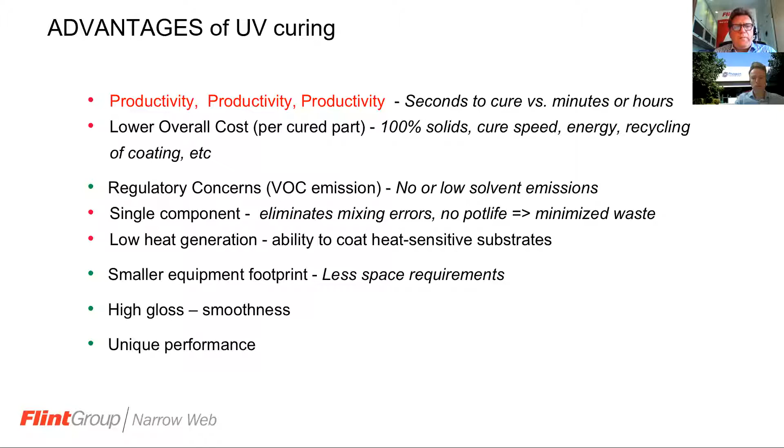The UV ink technology that's been around for most of the time is what we call mercury - you cure with a mercury lamp, a UV lamp. Fundamentally, that proven technology is pretty similar to a UV LED ink from a buildup and chemistry point of view. There are some fundamental differences which we will highlight, and one of them is the photoinitiators used in LED ink versus mercury lamp.

You use pigments, binders, and monomers to make the ink have the properties you like, and the cure performance you like, whether it's an offset or flexo ink, and you use different additives to enhance final performance.

The UV LED curing process is, as with any of these UV technologies: the ink is applied to the substrate, you expose it to UV light, photoinitiators react to the light and form free radicals, and these initiate the polymerization of the binder. So nothing evaporates - the binders cross-link and form a strong chain that adheres both to the substrate and internally, giving you a solid ink film. Solvents do not evaporate during this process.

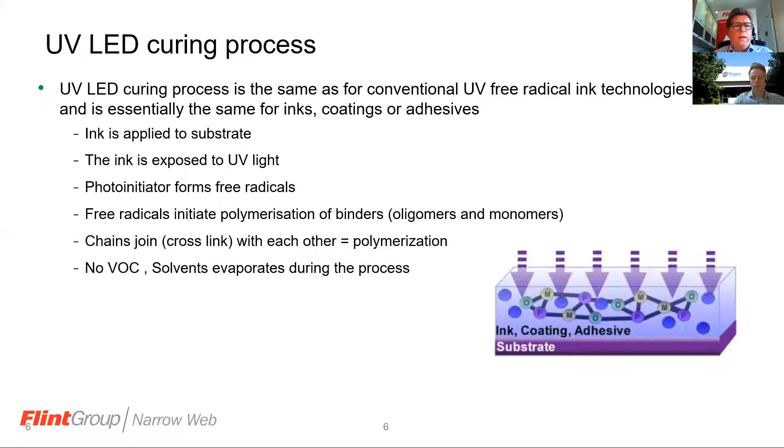This illustration refers back to mercury lamps, where you have a wavelength spectrum in a UV mercury lamp that goes from 200 nanometers up to 420. Different lamp types can have different peaks and troughs in this wavelength area - it's all over the place. And to be honest, it's needed to cure some of these things.

The pigment, illustrated here by a red, yellow, blue, and black line, absorbs the light, and that's why we see the different colors. This illustrates that red ink is easiest to cure because the pigment absorbs less light. Black is the hardest because it absorbs almost 90-95% of all UV light we emit. It's well known in the industry that black inks are hard to cure.

If we apply LED light, UV LED light, there is a very bespoke wavelength area where the lamps or diodes emit the light - that's 395 nanometers. It's then very important for the ink supplier to make sure photoinitiators are reactive in this area. The benefit of this wavelength is that black inks are easier to cure and cure better than with mercury, because the pigment is not so absorbent in this area.

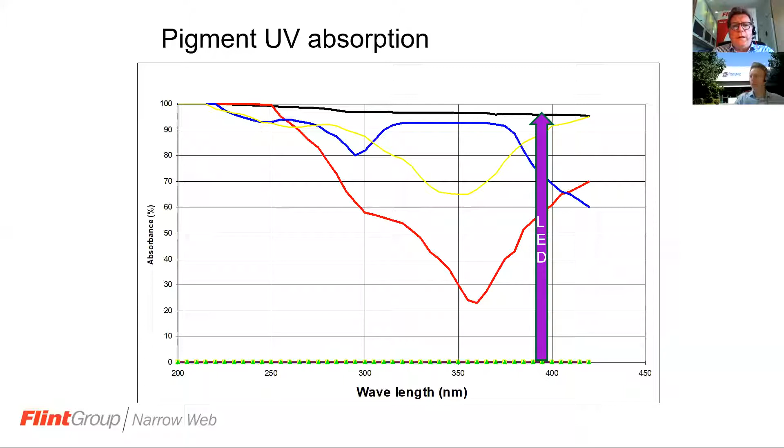Another fact with the 395 nanometer is that LED inks have better penetration of the ink film - the longer wavelength penetrates any ink film better, and therefore you get better bond strength, better adhesion, and better through-cure of your ink film. That's also a benefit that has been proven over the years.

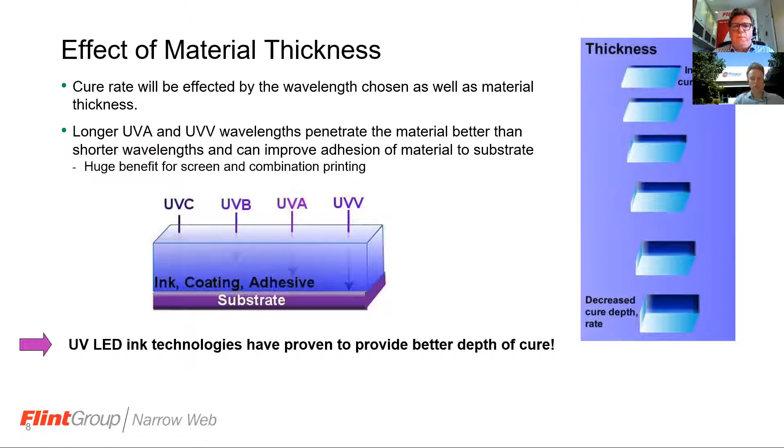We take some of the benefits of UV for granted - we feel complacent when we talk about these very strong benefits of a solvent-free technology. In the narrow web market, UV technology has been around for 20-25 years, and it's been going through the same sort of competition against solvent and water-based that we now foresee in flexible packaging. But the benefits are clear.

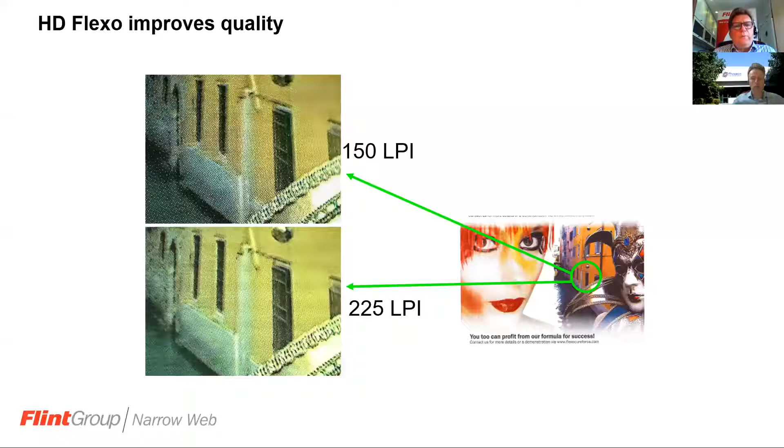I don't take this for granted for the ink - I know there are a lot of technologies that have been developing. Plate technology is one - recently you now have much finer resolution in printing plates available, and now you can clearly rival both gravure and offset technology with Flexo.

But you might say printing with UV on packaging, that must be silly - and maybe it was 25 years ago, because it was uncharted territory. But today, UV technology is proven and tested to meet all the most stringent demands for packaging print. In fact, there are no separate demands on UV technology - it's the same criteria we need to adhere to as for any ink system, whether it's solvent, water-based, or oil-based.

They all need to be of the right base to meet packaging demands. I haven't said it, and I know this has been mentioned before, as a reference to low migration inks. That terminology we don't use anymore.

It's been decided in EUPIA that the right term should be food contact material inks. There's a well-defined description of what is a food contact material ink and when we can't call it that. These demands are the same whether it's a solvent, water, or UV ink.

So one could say that food packaging safety is all down to the ink maker. In this simple analogy, it's obviously very important what we select to be in that ink container. But then that ink is processed, printed, and used in different applications with plates, anilox rolls, lamps. And in the end, the final end use should consider what substrate, how the package is stored, and the outer demands on the package. All these three elements together form how you can build a safe package.

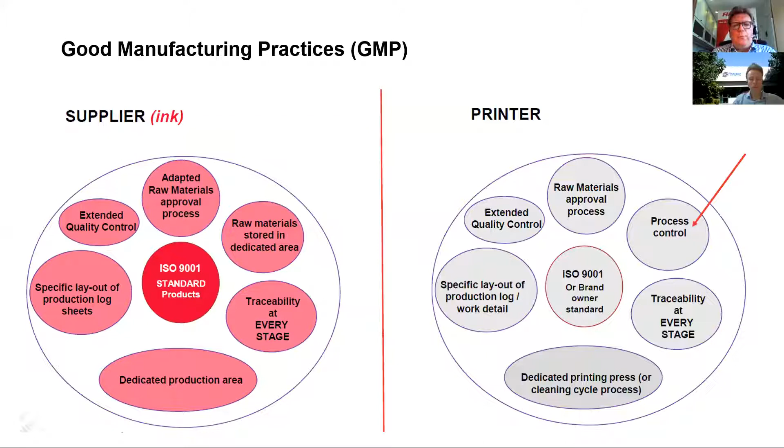One thing you might forget, if you're new to food packaging, is that you should also pay attention to GMP process in your own printing press or premises, because there are stringent demands on how you keep traceability and track record of what you actually did. I think here LED also offers significant benefits to keep process control of how you print and the lamp operation.

When we say food contact compliant ink, or low migration ink as the old definition, we said it has to comply with the following regulations. I apologize, there's not one single one that makes or breaks this, but I think Swiss Ordinance and Nestle Guidance Note are the two main ones people refer to today as modern requirements. All of these we take into consideration before we announce that an ink can be used for food packaging.

And we will obviously, in getting into that situation, support clients going forward with all the different means of how to prove to brand owners that everything is in good order.

The ink that Soma will be using at the demo you'll see later is EkoCure Ancora. It's fully compliant with Swiss ordinance and Nestle guidance note. It's an LED curing ink that we know, have tested, and proven will withstand most stringent migration tests. In this case, I just referred to 95% ethanol, 10 days - that's quite a stringent demand, and it passes all the migration requirements you have.

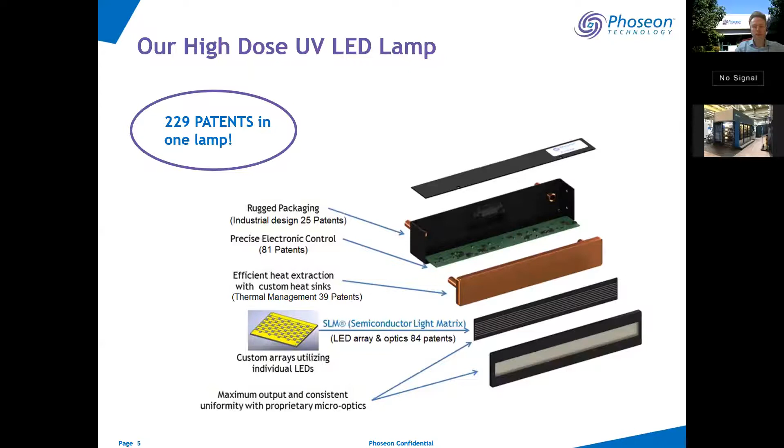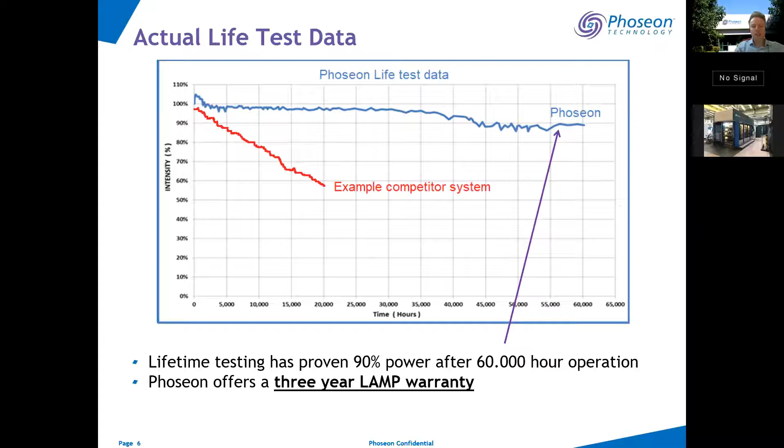The actual life test data of our lamps shows you that even after 60,000 hours, and that's 60,000 hours of operation, so we only count the on time, as LED lamps can be switched on and off within 20 milliseconds. So 60,000 hours of operation, and we are still at L90. L90 means we still have around 90% UV intensity. So this is well within the operating window of UV LED ink.

So why is UV LED in CI Flexo actually a good fit? Well, UV LED inks, as Niklas already mentioned a couple of times, they do not contain any solvents. So what does it mean for you? Well, for you, it means you don't have to clean the machine after every shift or unexpected stop like a power cut. So the ink can be kept on the machine, and you can come back the next day and simply start the press off. It does not cure without a lamp.

And this is a very important message here. And also the ink, as it does not have any solvent or water inside, it's really the ink behavior, and humidity and temperature does not have any influence on the ink behavior. So also no controlled press environment is necessary. There's no solvent. Again, we mention it because that's a big plus of UV LED. So you don't need an extra oxidizer in case you are thinking of a new machine, or any solvent recovery system. No ink or viscosity monitoring system is required.

And the machine, for example, that we will be showing today does not have ATEX, as the ink is just not really explosive. No solvents or ammoniac means no smell as well. UV LED lamps give you the benefit of a very much reduced heat transfer on filmic material especially, and on the CI drum. So no additional chilling capacity is required for the drum itself. And the UV LED drying is drying directly after the print station. No drying tunnels are necessary, giving you a much smaller footprint for your press.

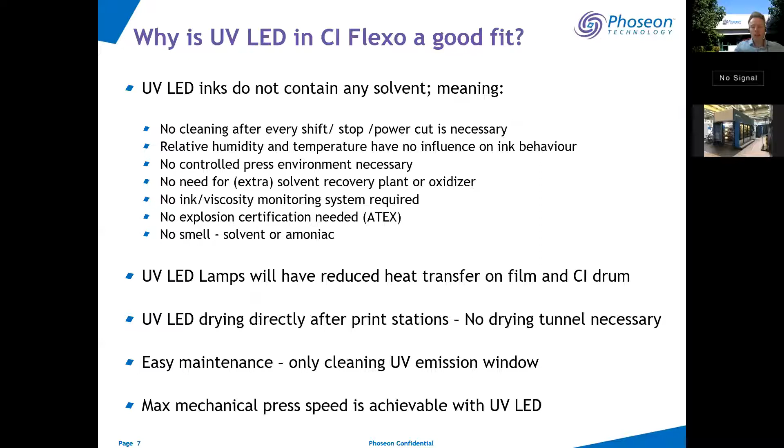So what benefits do you get in CI Flexo from UV LED lamps and inks? We identified here with our partners and customers who are already running UV LED lamps in CI Flexo three major topics, let's call them. The first one is what we call the advanced capabilities.

This is what you can do more with your press, and it gives you the possibility to run short print runs or just-in-time delivery. A very good example is the show we will be seeing here with the Optima Press, as they change jobs within minutes, which is virtually impossible with any other ink technology.

The heat sensitive thin substrates can be printed much better, much faster. The consistent and controlled UV curing process and the parameters that we give you just give you full control of your lamps and full control of curing.

When you use the same parameters with the same substrate and the same ink, you will get the same results. It will not depend on the environment, the operator, or any other external factors. The ink itself will give you brighter colors compared to water-based and solvent-based technology. And the lamps are IoT and Industry 4.0 ready.

So we like to call them digital curing, as they are very different to the analog system of mercury-based UV lamps. The economics, well, there are different factors here.

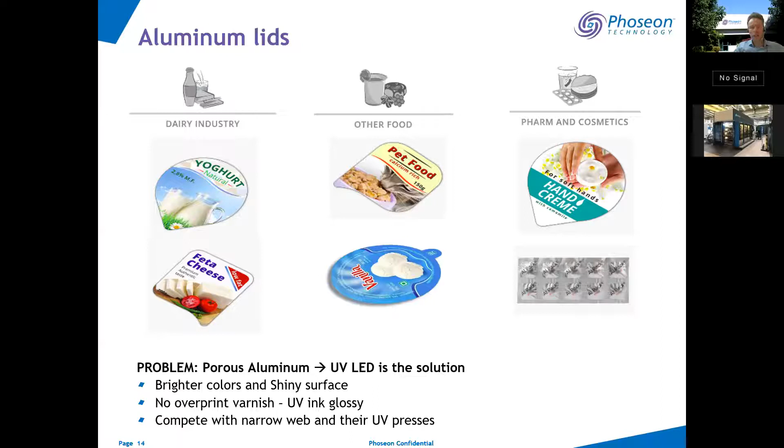So now the third presentation, which will be focused on the printing press itself. Let me start our presentation. As we have heard quite a lot about UV technology already, I will focus on the Optima Flexo press, and later in the second part of my presentation, I will focus on the UV LED modifications to Optima Flexo.

So if we take a look at the short-run Flexo family, the Optima Flexo family, the press which we will see during the demo is the one on the left-hand side, a startup press, mid-web segment, Optima Flexo, the smallest one in terms of width as well as repeat length. But UV LED technology could be implemented also to Optima 2 mainstream Flexo, which is 1.3 meters wide, or even to the 10 color or long repeat length version. So there are really no limitations for UV LED.

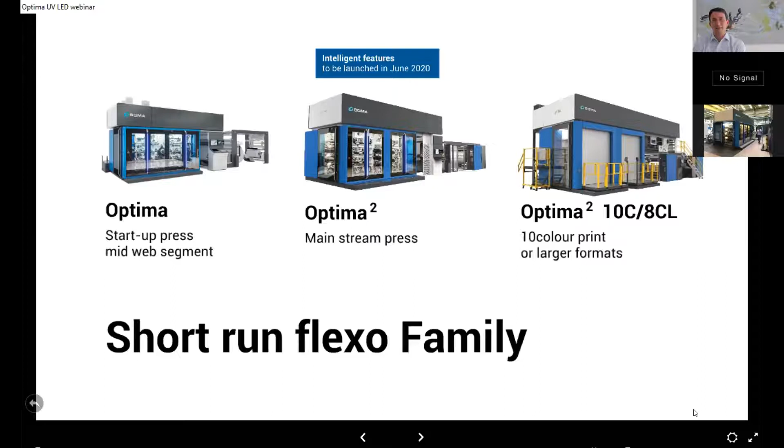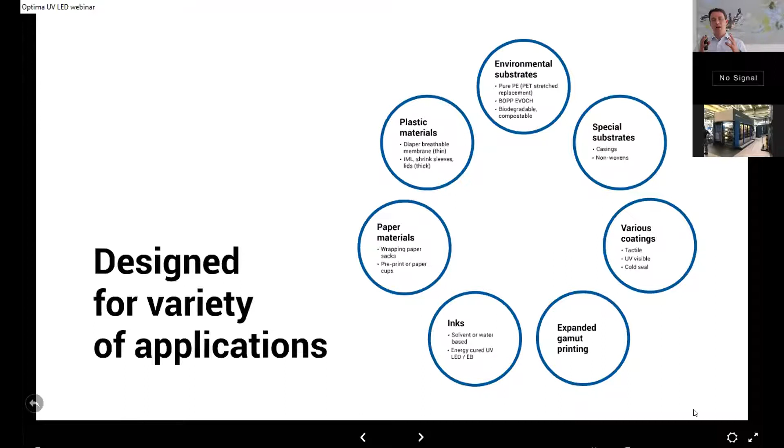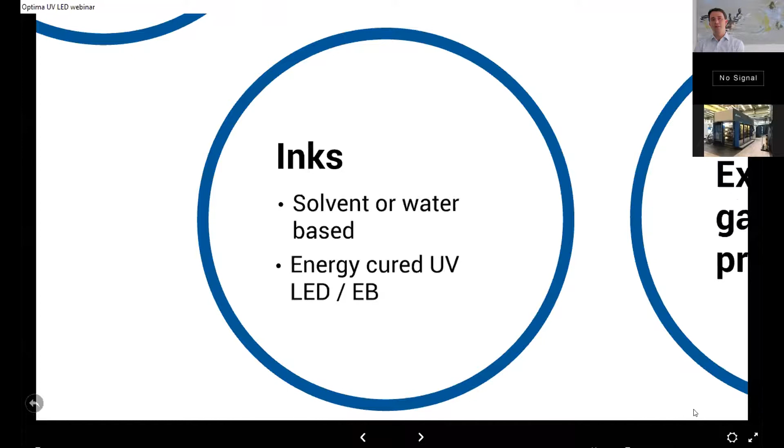So initially, I've seen that the audience is quite a few people from narrow web business. Optima is CI Flexo, of course, and that gives a possibility to print several different applications. In terms of inks, it's quite clear: solvent-based, water-based, or energy-cured inks, UV or EB. In terms of paper substrates, we have the possibility to print thin wrapping paper or paper cup, which is very thick and rigid material. And same with plastic, we may go low density polyethylene, just a few microns, a diaper membrane, or we may print quite thick lids or shrink sleeves. Of course, new environmental substrates and applications are feasible to print on Optima.

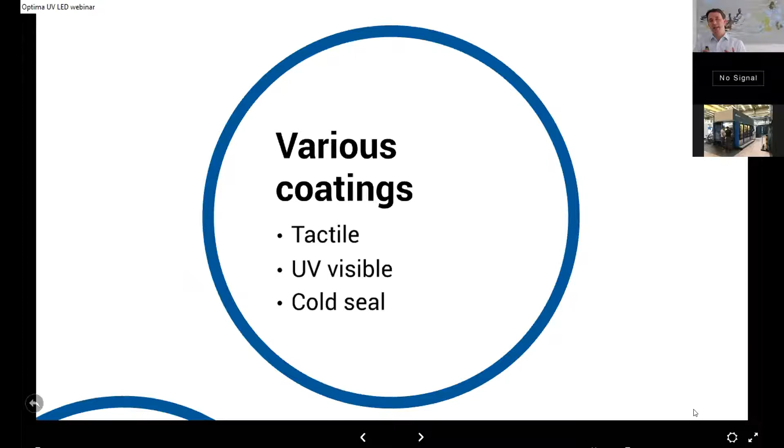And special substrates, such as casings - this is quite interesting for UV LED technology. Today you will also see a turning bar system on the printing press with an in-register reprint unit. All of this together with UV LED could be applied for the casings market segment. And mainly due to the downstream stations, various coatings could be applied, which again gives a wider range of possible applications.

Optima was designed for expanded gamut printing. This is a must for the future. So let me answer the question: how is it possible that we handle all of these applications? Well, this is due to 4 main reasons.

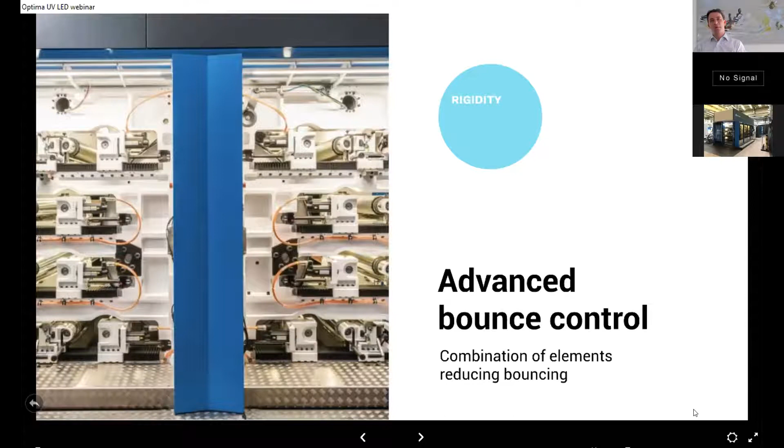So that gives you the possibility to print problematic designs with higher speed. This is due to the rigidity, meaning how strong the construction is, due to mass, how heavy the printing unit is, and also due to damping properties - what kind of material we use to minimize vibrations, like carbon composite or cast iron.

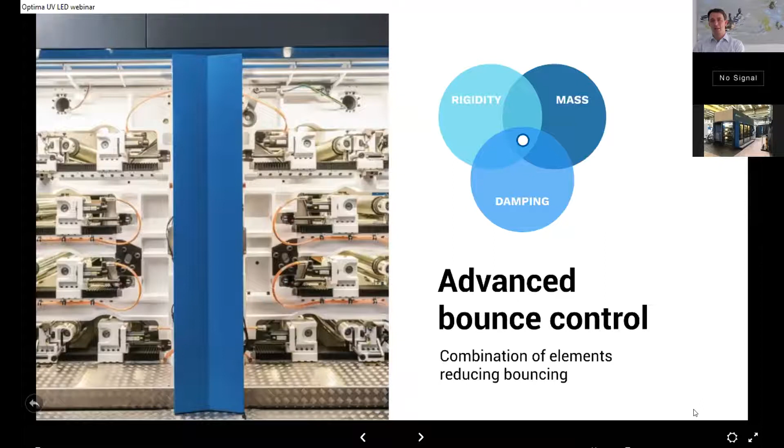Let me mention one more thing. In the next upcoming webinar, we will launch a second generation advanced bounce control system with one new intelligent feature that really improves print quality. Not today - at the beginning of July, it will be public.

Side frames, extremely heavy, very rigid, made out of one piece for small Optima. CI drum just goes in the middle, made out of cast iron. So again, very good dynamic properties.

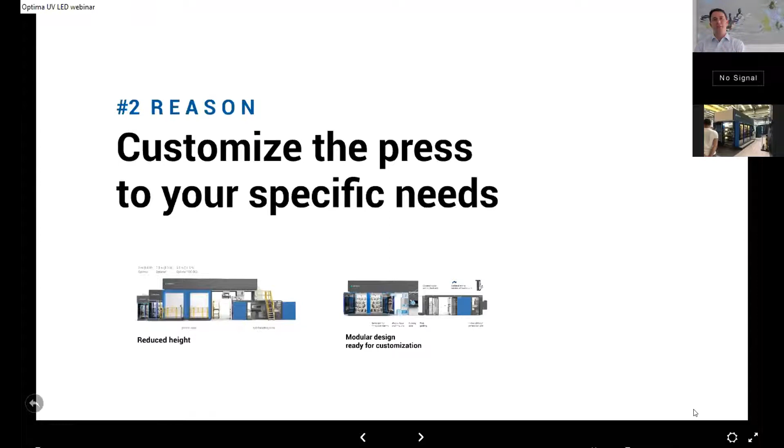Reason number 2, to be able to print all those different applications. Customization to your specific needs.

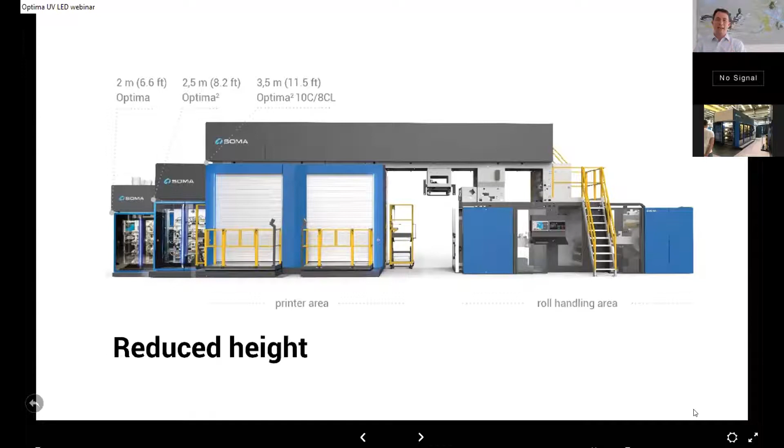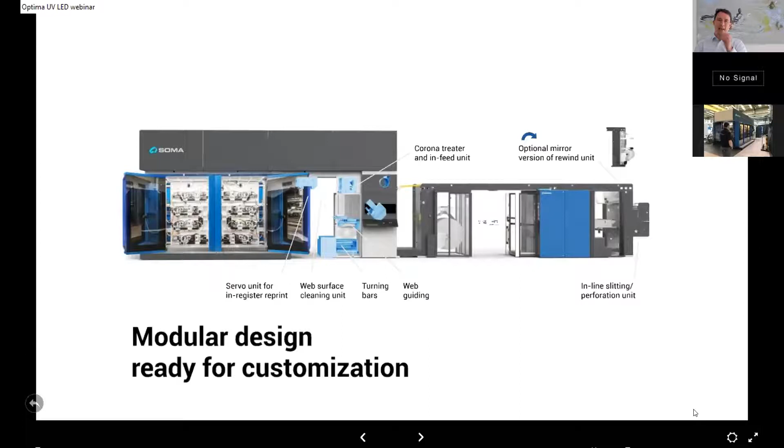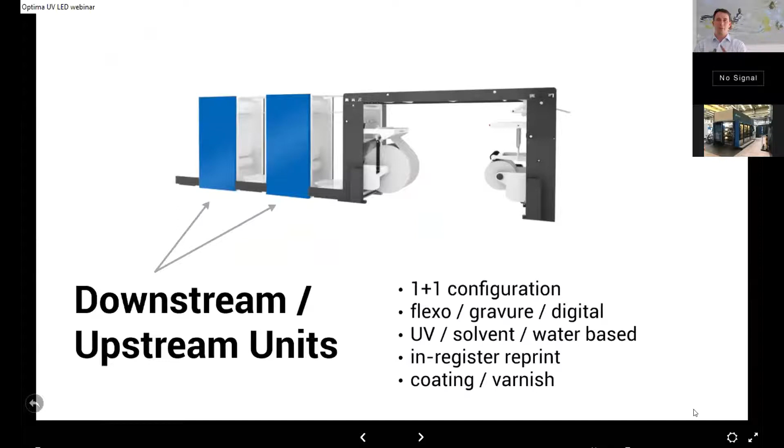If we take a closer look at the design of the press, not only is it one of the smallest on the market in terms of CI Flexo, but we divided the printer and roll handling area so that the right-hand side of the press could be modified according to your specific needs. That part we could adapt to your specific application during production of the press, or later on as a retrofit. So different winders possible, but mainly different downstream or upstream stations - Flexo, Gravure, digital, UV, solvent, water-based, in-register reprint, coating, varnish. All of that is possible, providing several different options in terms of application.

Reason number 3, yes, short runs. Long runs are history, short runs is future. We developed a technology that minimizes the job changeover.

Here, maybe I'll reveal a little bit about the upcoming webinar, not today but in July. We will show you the new automatic plate mounting. We try to automate the process, so we will automate the plate mounting, meaning it will be quick, without human error, a very precise process. As part of the automatic plate mounting, we will measure the register as well as the topography. This is the ARUN technology, so that later on the press, we would set register and impression in fully automatic mode without human operator mistakes. That's called ARUN technology - wait for the next webinar.

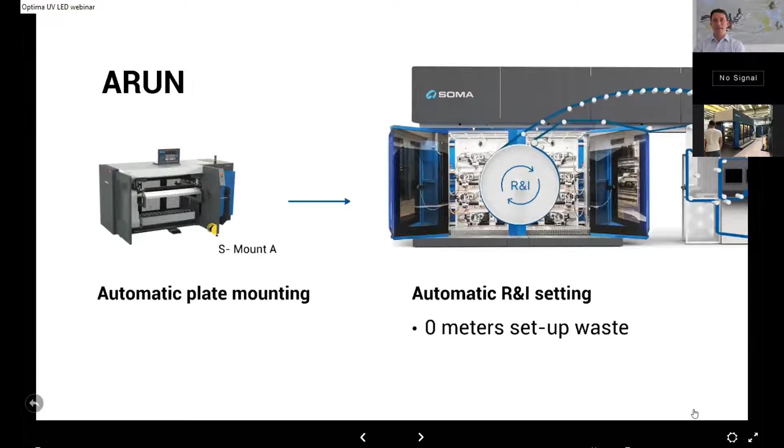Today on the press we have Falcon 2 system, a semi-automatic system. But since we are focusing on the UV LED technology, we will not use ARUN, we will not use Falcon 2, we will use recipes to do the quick job changeover. If you are interested in a really high-tech changeover technology, wait for the next webinar.

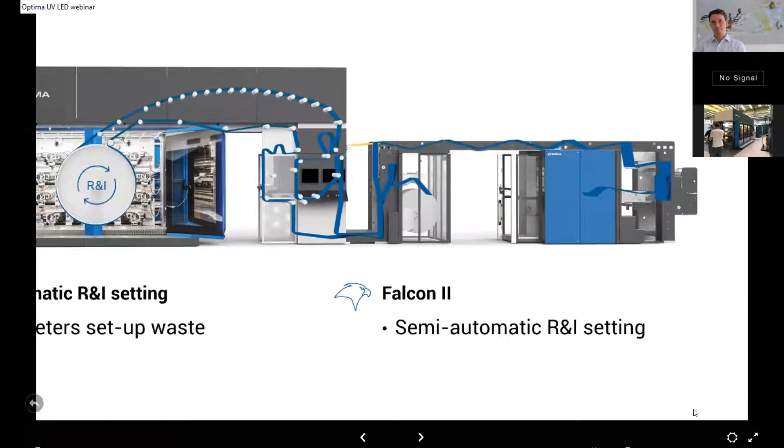And the cartridge system - this is what we will see today, because that's really a special feature only available by Soma. And for UV LED, this is quite handy. It is an ink compartment locked directly to doctor blade chambers.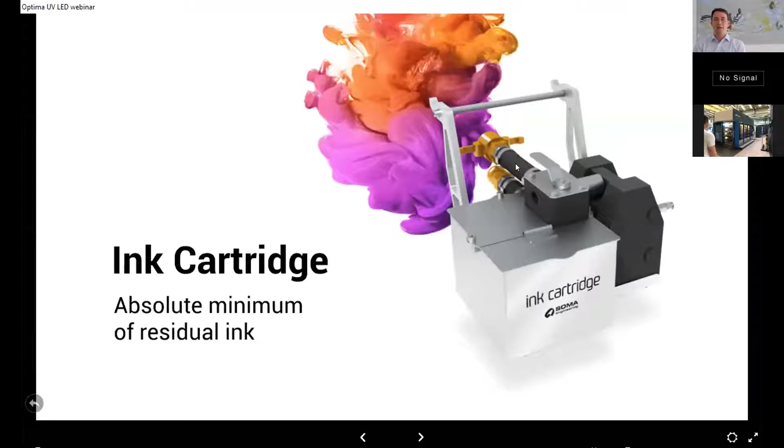You see here the small houses, so we omit the long housing and the whole inking system. The cartridge is locked directly to the doctor blade chamber, so we start to print with minimum amount of ink. And also for the wash up, there is minimal residual ink in the system. So for applications like metallic ink, or Pantone which has a very small area to be printed, or UV LED ink, or any expensive ink - this is to minimize the residual ink in the system, in the cartridge.

And the last reason, and then we'll go closer to UV LED technology - it is environmental printing. Optima was designed for hybrid solvent and water-based presses, as well as for energy cured, which are considered environmental, and this new biodegradable substrate.

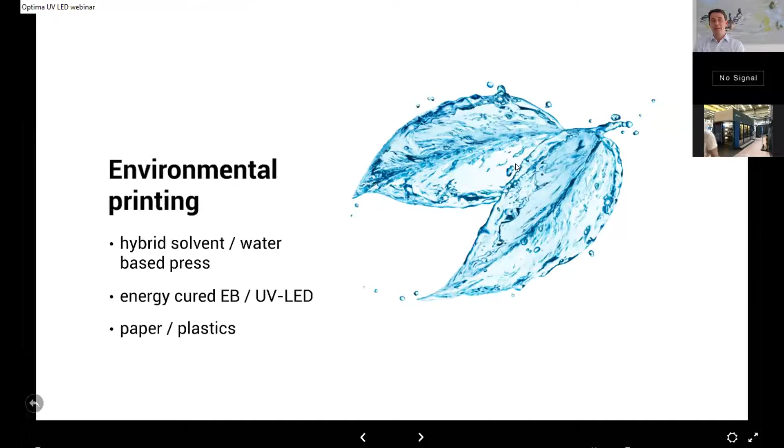So when we go to UV printing, in general UV, this is a green technology. This is what the brand owners would like to have - no emissions, no solvents, VOC emission-free printing.

As we heard, there is a higher pigmentation in gloss, so therefore we may use less ink for the print. The amount of ink to be transferred onto the substrate is much less compared to solvent-based. And we do not have to do any wash up, as Adam said, at the end of the shift - again, no solvents involved. In connection to ECG, this is efficient, but this also saves nature.

When we take a look at the benefits, especially of UV LED printing, there are several other benefits - 50% less energy compared to conventional UV. There was a question regarding the speed - yesterday we printed 300 meters per minute with both of the designs. Several other benefits were mentioned before.

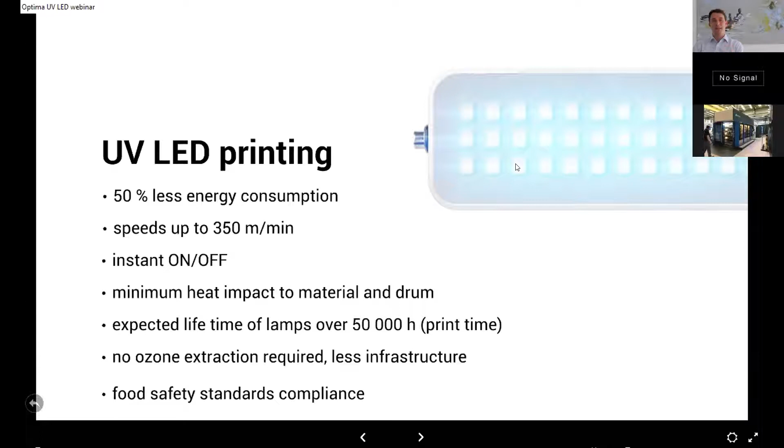So let me get to the point to introduce the press which we will use during the demo. As we said, it's a mid-web version of Optima.

Maximum speed is 350. The web width of the press is 1 meter, 650 millimeters repeat length. The press is equipped with a slitting unit up to 5 slit rolls, with turning bar system together with in-register reprint unit.

Or so-called in-setter, and we said it is ECG ready. In terms of UV LED features, one special feature is a unique cartridge system I already spoke about. Then the press has ink thermal stabilization, so that we keep the ink in the desired temperature range. We developed an ink connection swap system for easy changeover.

This is going to be introduced by my colleague Roman. And quite interesting is that this printing press has a water-based drying tunnel. So we have the heads around the CI drum, but we may apply the water-based coating.

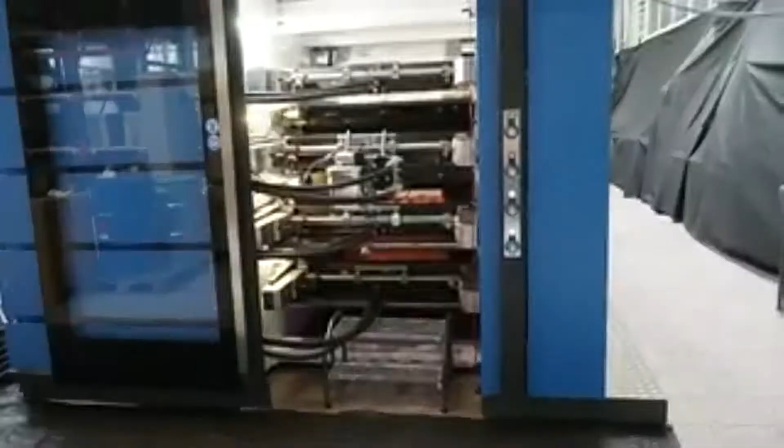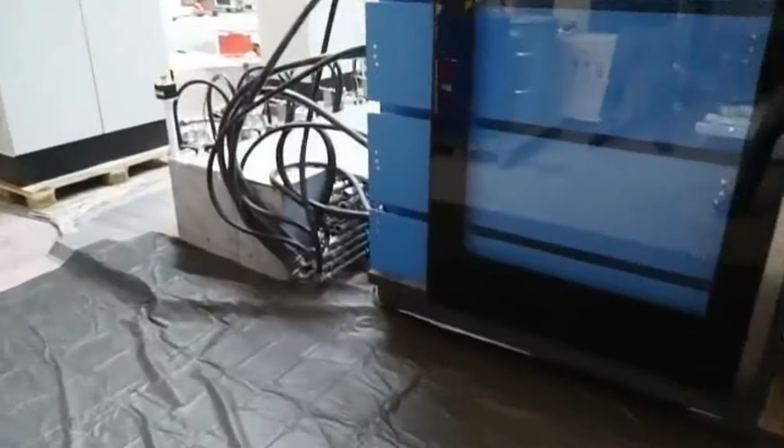As Peter mentioned, we are printing on the Optima printing press, which was optimized for printing with UV LED inks. I will slowly start introducing each part of the printing press so you can learn the modifications we implemented inside. Andrew, our cameraman, please focus now on the ink pumping unit and the ink connection swap system, as the inking system was adjusted in order to print UV LED by increasing the hose size.

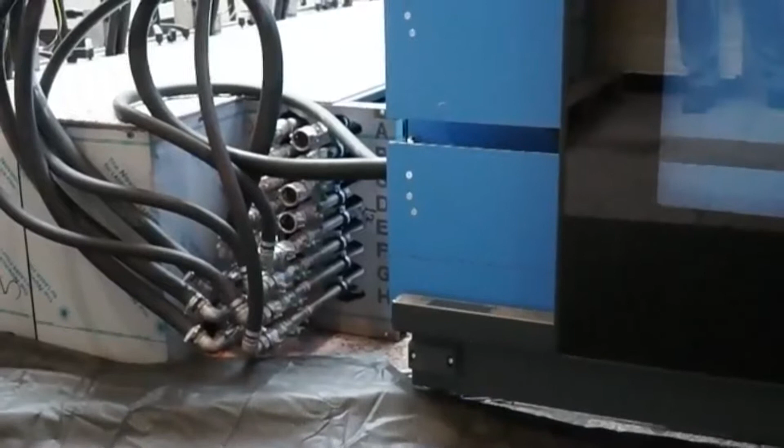We implemented this connection swap system in order to make the ink order change, ink order swap inside the printing unit easy. It means that we are not performing a washout during the changeover of the inks, but we simply disconnect these pipes, what you can see in front of you. Then we remove the doctor blade chamber from its position and put it in another position. This can be done easily without washout, which saves a lot of time, saves the ink, and saves a lot of money. Now I would like to speak about the ink cartridge, what Peter already mentioned in his presentation.

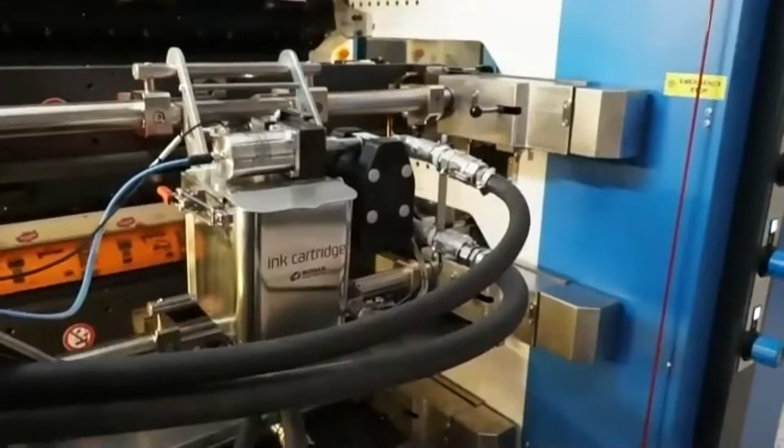This ink cartridge is a unique system which you can get only from Soma, nowhere else. It means that this ink compartment is directly connected to the doctor blade chamber. You fill up this cartridge with ink and you can start printing with as low a volume as 1 liter. Expensive ink, silver ink, thermal sensitive inks, Pantone for small areas - it is the ideal solution for it, with viscosity control, ink pumping, and an automated wash-up system.

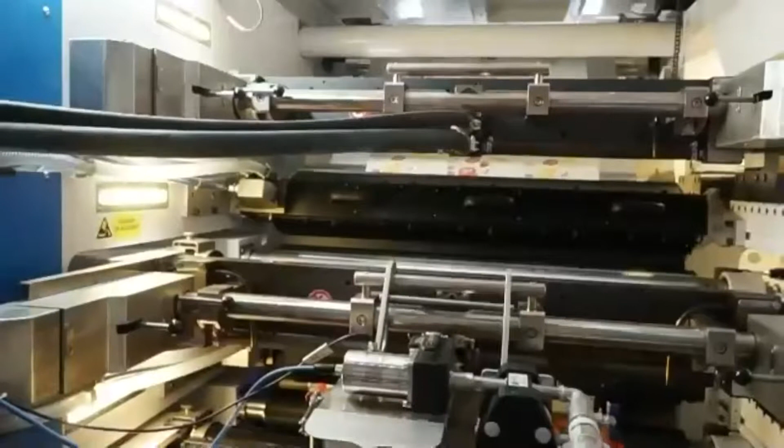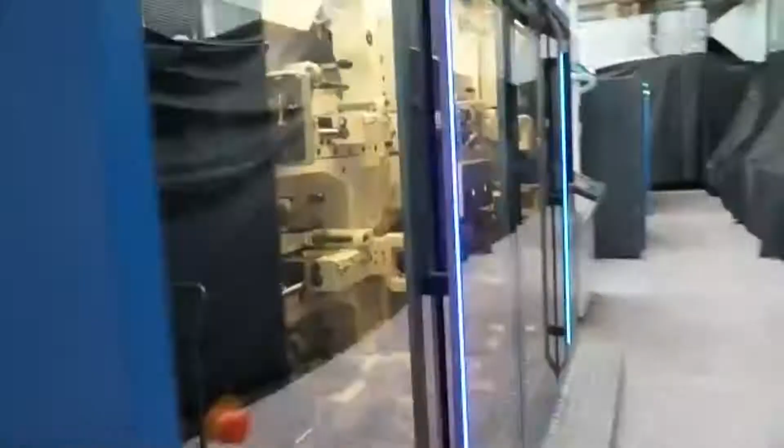So above the ink cartridge, we will focus on the Phoseon lamps, UV LED lamps implementation inside the printing press. You can see that you get very easy access, and it's a very efficient solution for printing and implementing. Now I will ask our cameraman to walk alongside the printing press, and David, our printer, will start printing the first job, slowly.

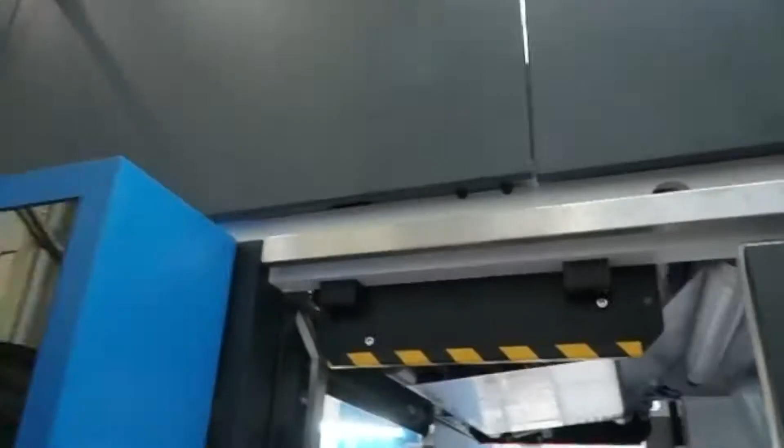We are walking alongside the printing unit, 8 colors printing unit, now focusing on the reprinting unit, or if you want to, Insetra. And above the Insetra, there is the hybrid water-based drying system. It means that this is a hybrid printing press, which allows you to print LED UV ink as well as water-based varnish in the last printing deck. So the tunnel, right? Yeah, we're talking about the tunnel, correct.

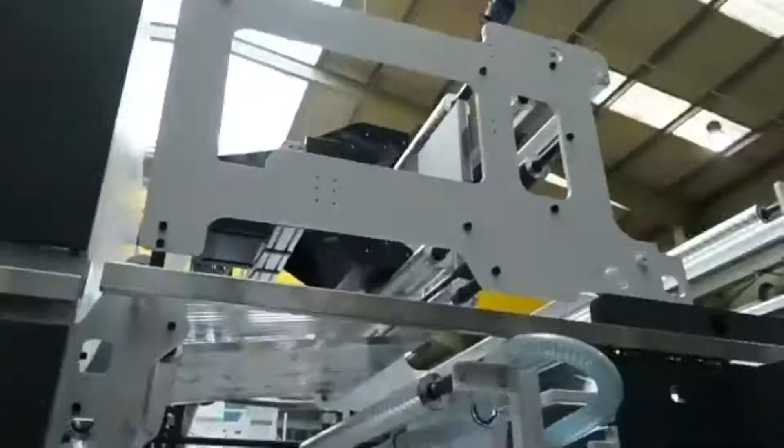Now we are focusing on the graphic control camera, which is positioned very closely to the viewing place and very closely to the printing unit itself.

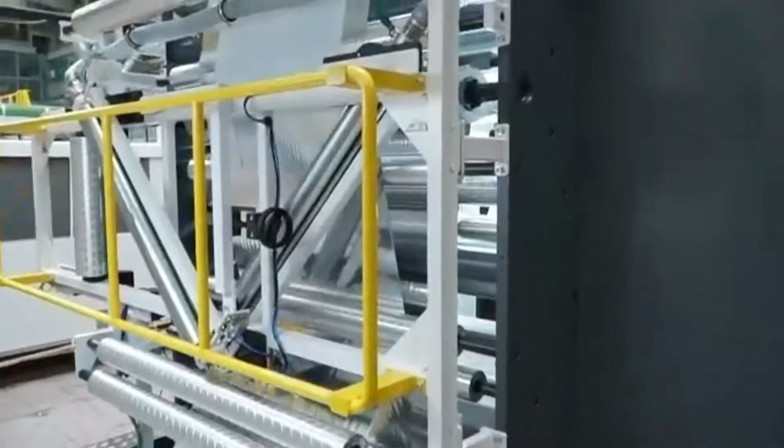And at the same place, you can see the turning bar. We are not using the turning bar today for this application, but this is a very efficient way to perform both-sided printing during one run.

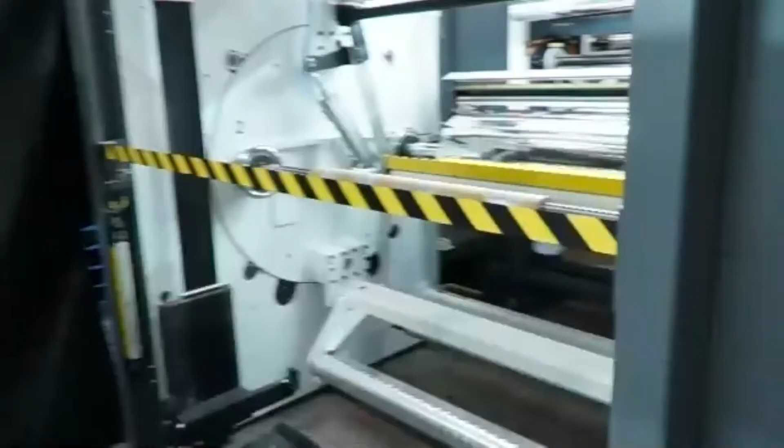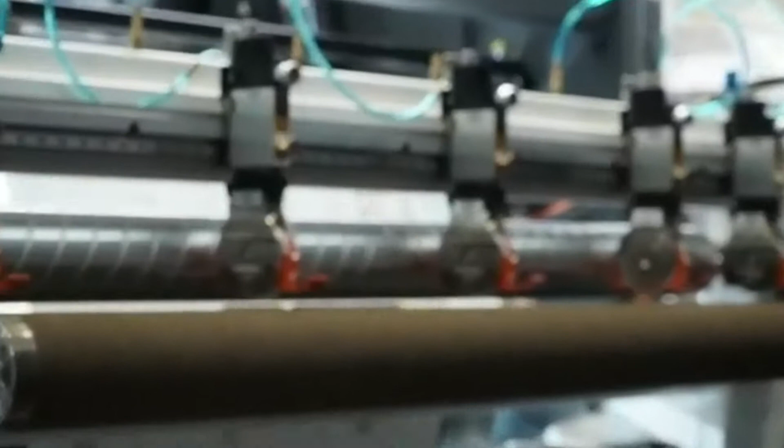Now we can continue to see the non-stop unwinder and non-stop rewinder. The construction of the printing press is variable, so the customer can choose a simple unwinder and rewinder, or it can be modified later directly at Soma. Now you can see the slitting unit, which can use either razor blades or a rotary knife. We've implemented Maxcess rotary knives up to 5 slits, including the edge removal system.

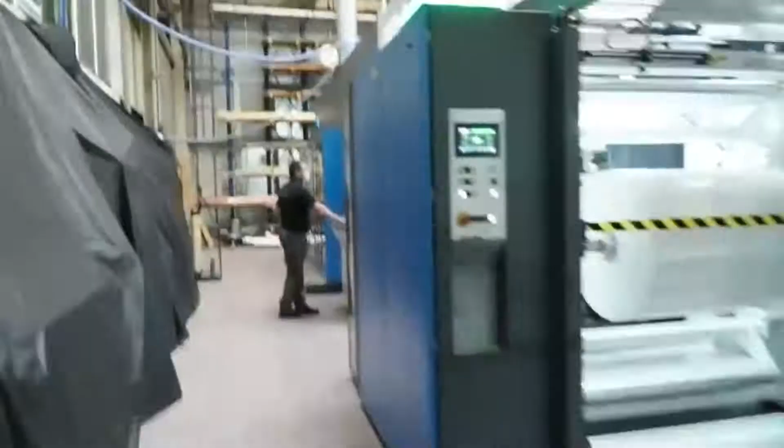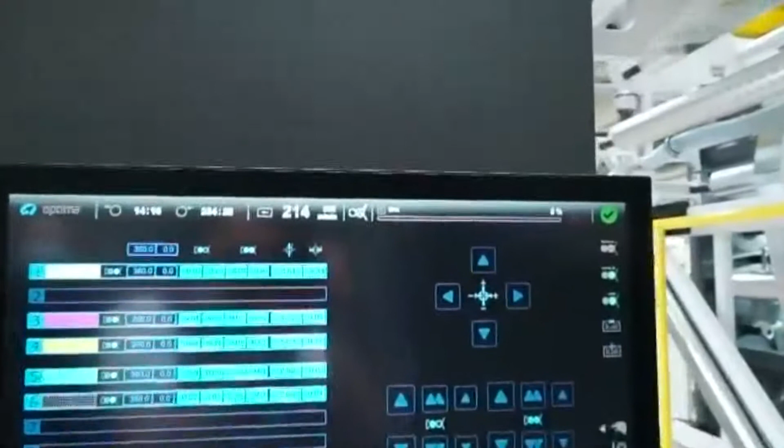So we can walk back to the operating place where David already set the first printed job. We will be speeding up to 300 meters per minute, which would be, in this case, our normal production speed. We will not take a physical sample from the first job; instead we'll inspect the print on the screen and in the viewing area. Maybe take a look at the web camera again.

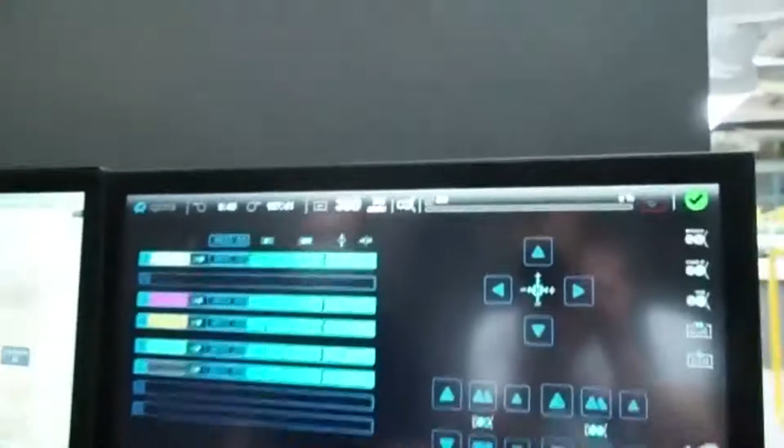Okay, we reached the speed of 300 meters per minute. We can check the camera screen, and David will not stop the printing press so we can review the printed sample from the viewing place. Nice, everything is nice.

The inspection area, as you see, is very close to the operating panels, so virtually making just one step gets you very close to see what the press is actually printing. We are printing CMYK plus white on a metallized BOPP substrate.

This is a production job, a food appliance job printed and sold here in our country. In detail, you can see that the coverage of the ink, impression, and registration is perfect even at a speed of 300 meters per minute.

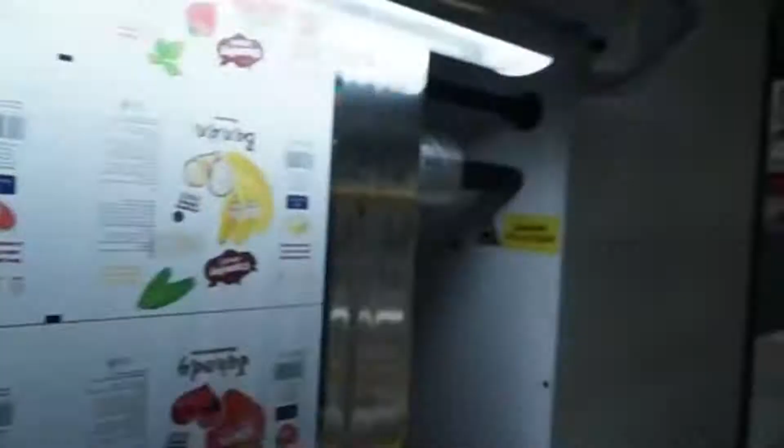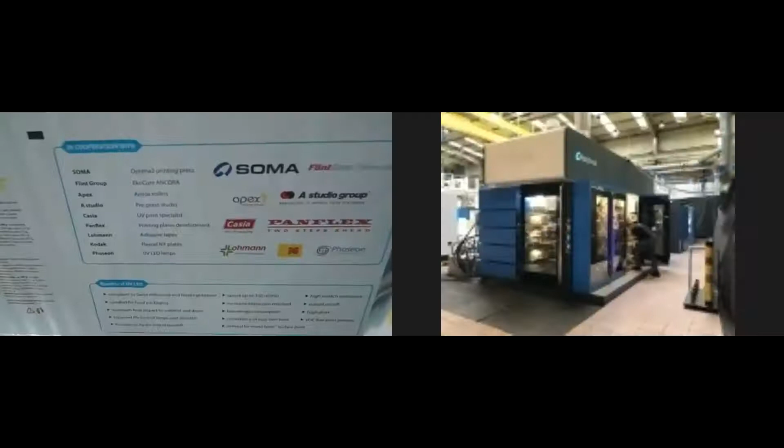And Andrew, if you can now focus on our partners who are working with us together on this project: Flint with its LED UV ink, Apex for Anilox, A-Studio Group helped us with the graphics for these jobs, Casla is the owner of these production jobs, Panflex prepared these printing plates for us, Lohmann for sticky back, Kodak for NX plates, and Phoseon for LED UV lamps.

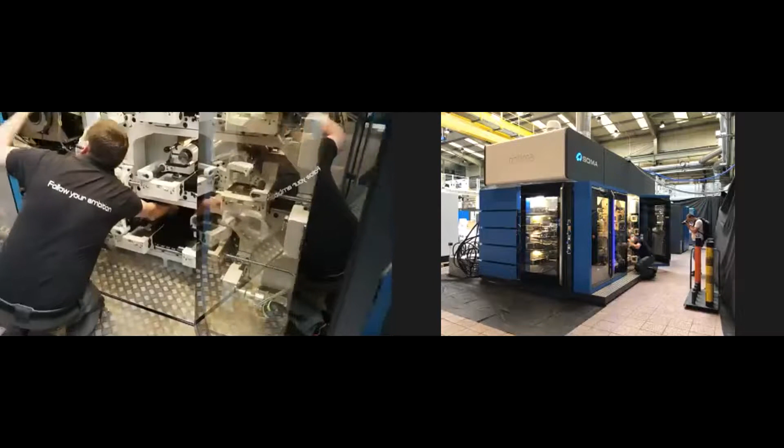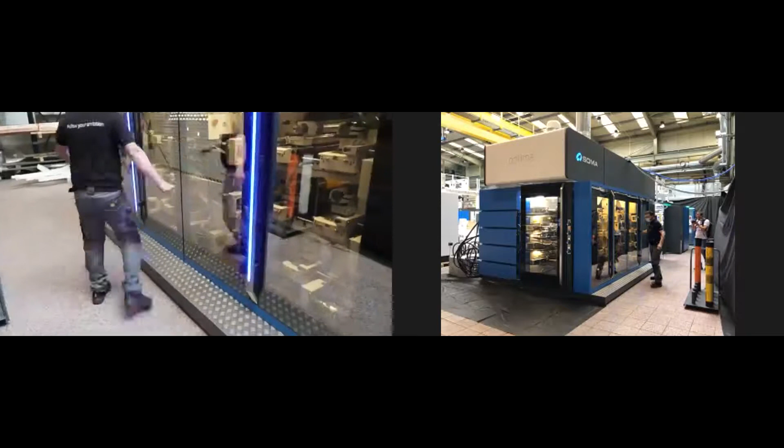Optima can be operated by one operator, or actually the correct number would be 1.5. This is interesting - for wide web printers, Optima would be considered a small printing press. We really try to make everything reachable from the ground, and we designed the press so the web is accessed very well from each single point.

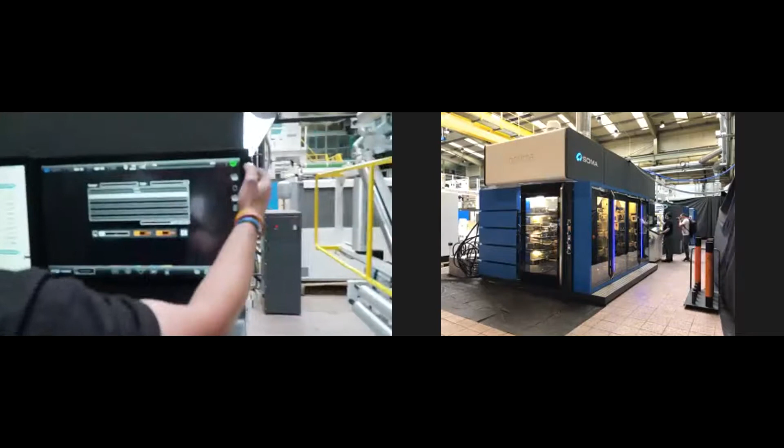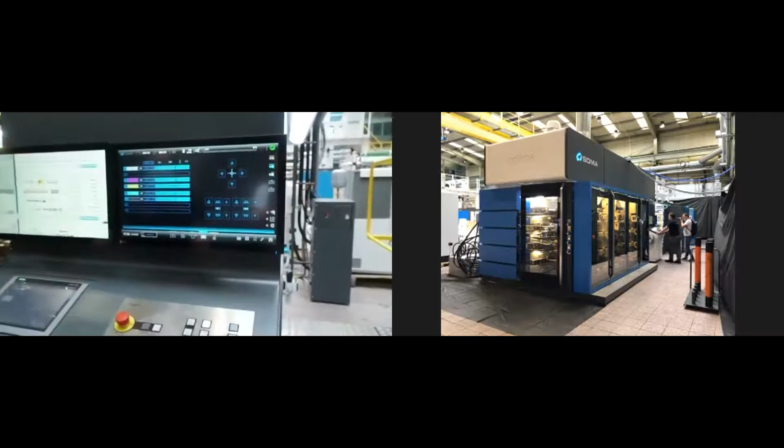But for narrow web printers, as I've spoken with customers, Optima is quite a big printing press. So it depends on the point of view, but it's very well designed ergonomically to operate, for sure, compared to any other competitor CI Flexo press. That is why Optima, this mid-web segment Flexo, is considered the next choice for narrow web printers if they would like to step into the flexible market. Correct.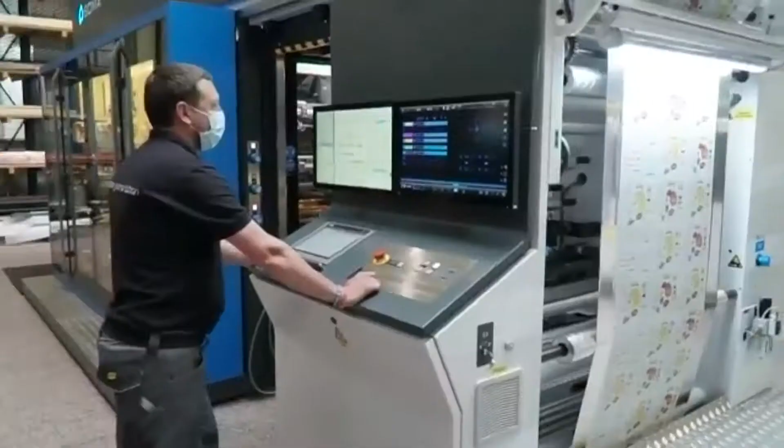Now you can see that we are setting the second job from the recipe. We omitted the setting job with the semi-automatic system Falcon 2 or fully automated system ARAN, because in this demo we wanted to focus especially and directly on the LED UV print technology. So that's why we keep it very simple.

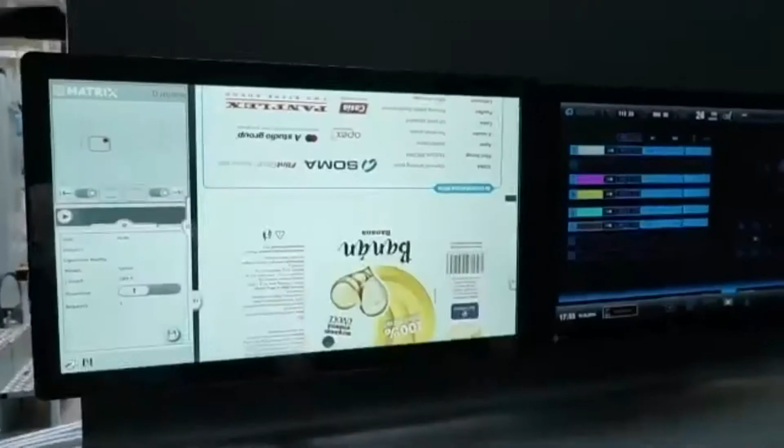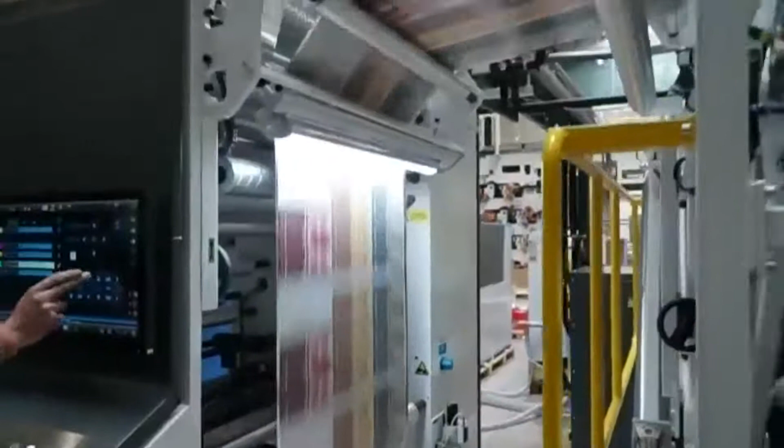So at this point, we printed the job earlier. We stored all the data regarding register, impression, and other settings in the recipe, and David just recalled the recipe from memory. And instantly we may start to print.

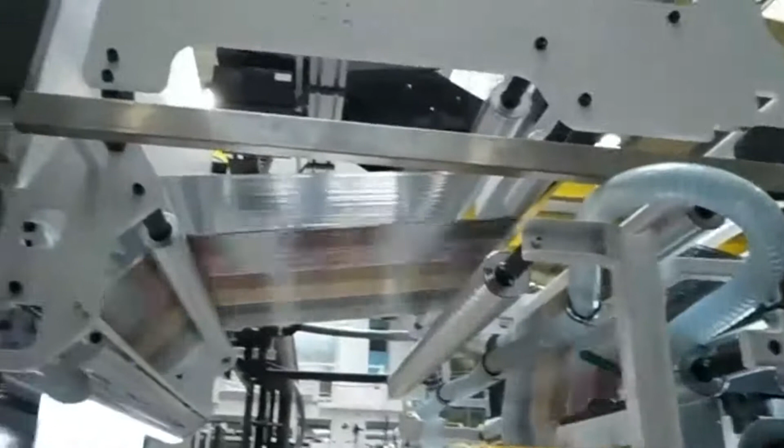You said it's 1,000 recipes, Roman? More than 1,000 recipes available. So an indefinite number in this case. This second job we will be printing at a speed of 300 meters per minute as well.

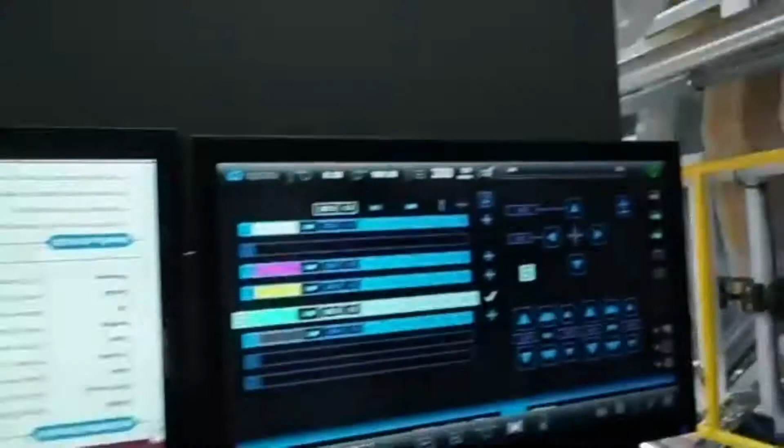But the difference from the first one is that we will cut the sample from the rewinder. So we can see the stable picture, perfect registration, perfect impression, printing at maximum speed. And now, David, please, let's take a sample at the rewinder.

At full speed, right? Full speed. And when we take the sample, then we can stop the printing press.

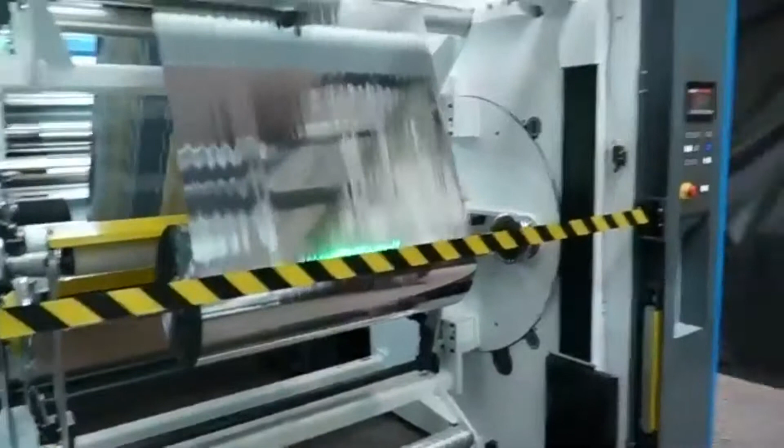The press is so quiet, I don't hear any noise. But basically for the wide web printers, you would be very surprised because there is no heating, no ventilators, no fans of the heating tunnel. So when printing UV LED, for the wide web printers, this is quite interesting, the quietness, the noise level of the press.

The best way would be when we get an opportunity. This demo is actually an invitation for you to come to SOMA, when the time allows, to see the demo or trials directly in our SOMA Globe Technological Center, as we are fully equipped with the machinery and environment to perform this type of trials and demos for you, in order to get confidence in our machinery and our services.

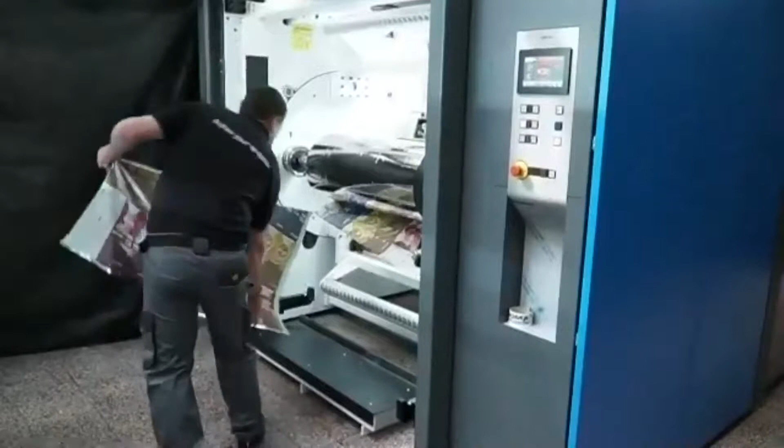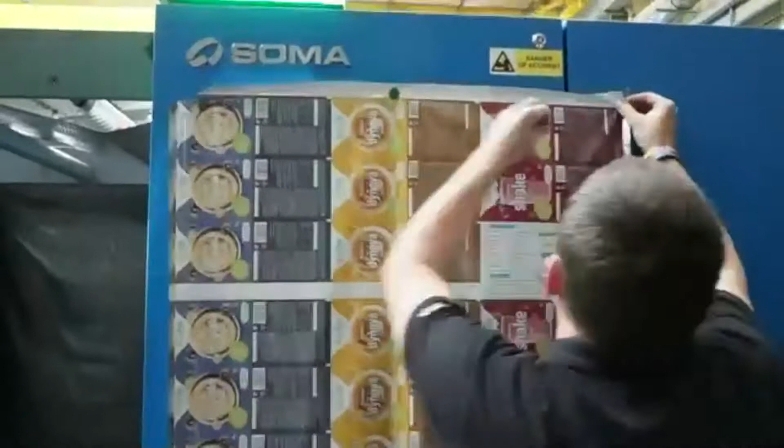Now David has taken the sample from full production speed, 300 meters per minute, and I will ask Andrew to inspect the printed sample closely. So again, this is food packaging, some sort of soup or maybe? It is a soup and it is a shake, so it is mixed production.

The same partners. Peter will speak about the samples that at a later stage we will be able to share with our sales guys and representatives, so you will be able to inspect them on your own eyes as well.